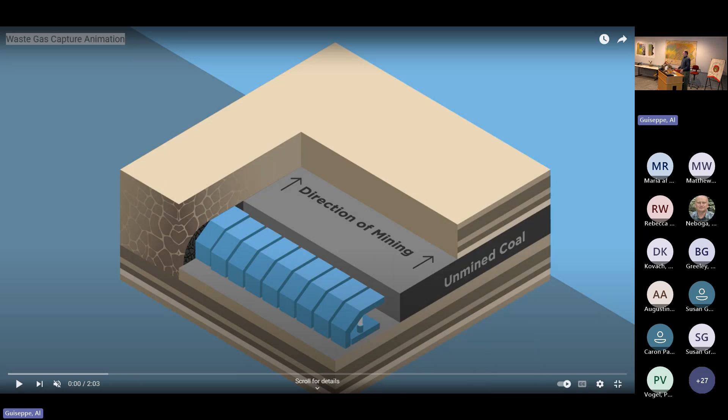By way of introduction, I just met him an hour ago, so I can't tell you a little story about knowing him for years. All I can say is that he's from Buffalo, so this weather ain't nothing to him. It's fine, like springtime. I know what you guys complain about.

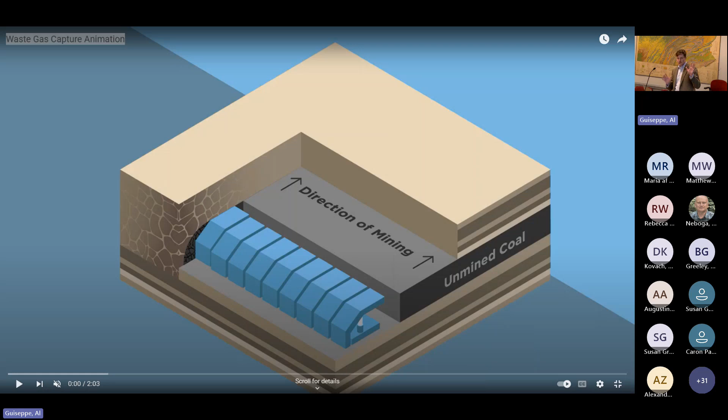Okay, so I won't delve into too much fundamentals, but I'm a visual learner, and I have a visual aid that a team of us put together to explain why methane is part of the mining process, and why degasification is so important from a safety perspective when mining is happening. So what I've got is a YouTube video, and I'd be happy to share this link with anybody who likes it. We're starting with an isometric view of what's happening underground.

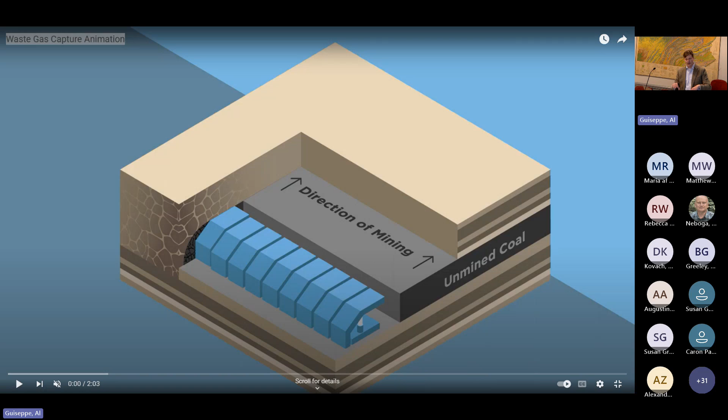On the right, you've got unmined coal, and this is typically a longwall mining operation where the blue supports you see are roof supports, where people are going to be standing underneath. That basically is what keeps anything from collapsing over their heads. As we click play, we'll zoom into what's happening under those blue roofs.

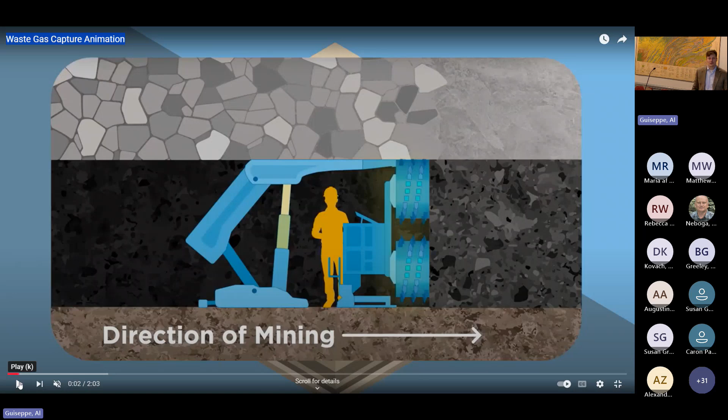At the front, on the right here, is the face, the longwall face, the shears. This is what's effectively mining this unmined coal to the right, turning it into smaller chunks and bits, and it gets spit out behind this guy. That is basically how mining is happening.

What we're going to see in yellow here is we're trying to animate the methane being released. Within the coal itself, there's a certain gas content. Geologically, each coal seam has a different gas content, and that determines how much methane is escaping into the underground workings. That's one component that contributes to coal mine methane.

The other component, you can see that yellow stuff coming out as he's moving forward. As that mine progresses and chews into that coal seam, you saw that roof bolt, or that roof above the guy, kind of hydraulic lift. It just pushes up and follows him forward.

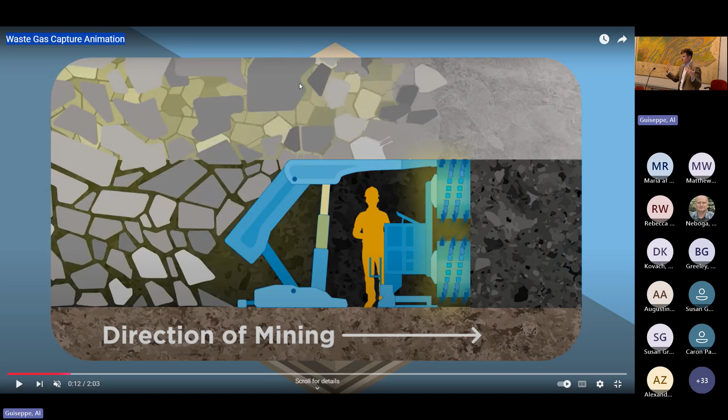And as it moves forward, the overlying strata that was previously mined collapses behind that roof support. And what's happening here is this overlying strata could be shale deposits, could be coal deposits, and all of that stuff collapses, fractures. There's mechanical fracturing, there's elastic deformation, inelastic deformation. All of these kind of stresses and strains are causing a release of gas from that overlying strata.

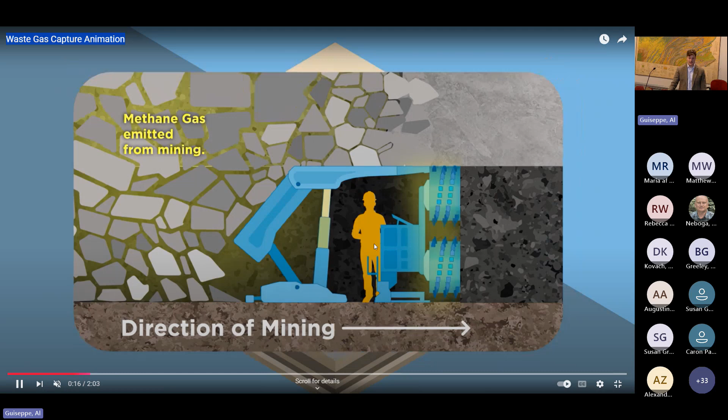And what we're trying to animate here in yellow is as the collapse happens and that mechanical fracturing and breaking of rock and shale and coal is happening from overhead, that is also releasing methane. And that can also get into this working area where this gentleman is mining. So as each kind of roof support moves, we're now going to animate what's going to happen with each thing happening in individual sequence.

The width of a longwall operation can be 500 feet to 750 feet, and the length of an operation can be 10,000 feet long in one direction before they move over to the left or to the right. So going back to this situation here.

So this guy underground has got methane coming at him from multiple places, right? It's coming from the coal seam as that coal is being chewed up and turned into smaller bits. That's releasing methane. As this overlying strata fractures and crumbles and unlocks elastic deformation and inelastic deformation from above, that's causing a release of methane.

Also, one of the interesting things that actually happens, and I didn't animate it here, is because of this pressure release that happens as you remove this coal and there's less pressure that comes down from above, some of the underlying strata can also release methane because it used to be held in place with pressure, and that pressure suddenly gets released.

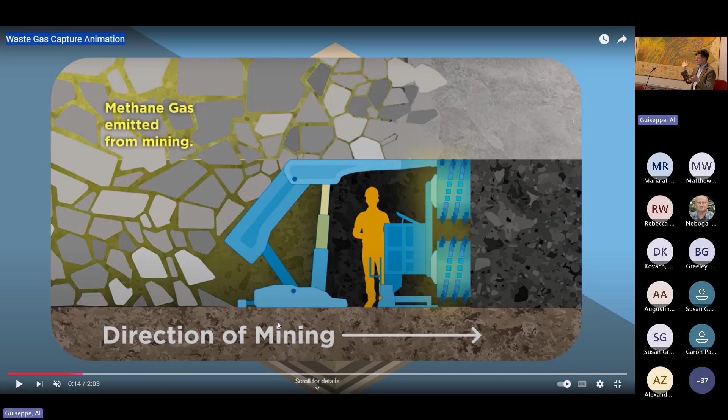So he's got methane coming at him from all sides, right? It's coming from the front, top, back, behind him, below him. So degasifying this mine is what allows this to happen safely. Methane is extremely combustible. Natural gas is primarily composed of methane. Lower explosive limit is 5%, 5 to 15% methane concentration is your typical.

Yeah, and so down underground, they don't want their methane concentration high. I think MSHA, so Mine Safety Health Administration, regulates the methane concentrations underground, and they must be below 2% at certain mines. The methane concentrations where these miners are working are monitored with high frequency 24/7 at multiple locations. If that methane percentage gets to 2%, they have to evacuate the mine, right? It's a bad day for everybody out, and we have to wait until the methane concentration comes down.

So mine operators don't ever want this methane concentration to get to 2% because of operational issues, but that Mining Safety Health Administration set that limit for a reason, and that is because underground explosions are the #1 cause of disasters in the mining industry, right? And so looking back to the 1800s, you had the canary in the coal mine, which was looking for methane, and if that was a problem, the canary died, they had to get out, right?

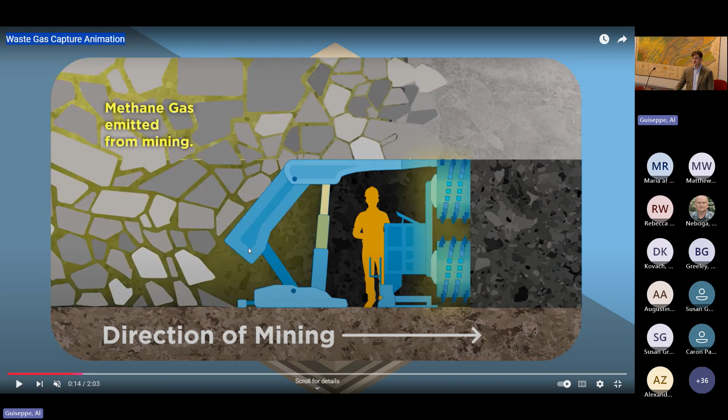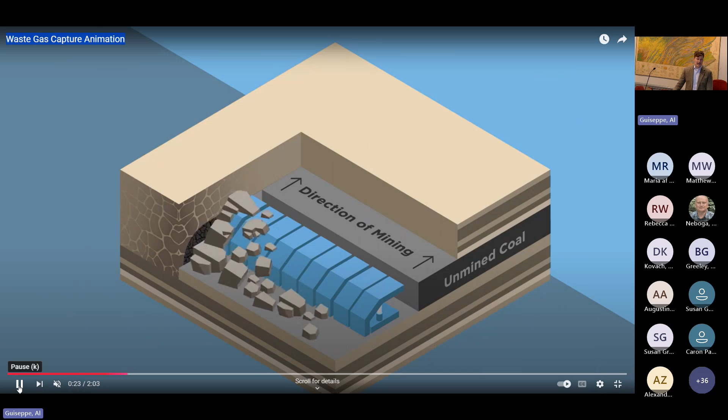So this is now being monitored with devices underground, and there are now procedures and processes in place that we'll go over next to get this methane down at safe limits to avoid any potential explosions or health hazards and for safe operation of the mine. So how do mines safely degasify the mine? And so we saw the crumble there.

What typically happens, traditional mine ventilation, they'll have an air intake above ground, which effectively they pump and they sweep across this working area with fresh air, and they push the methane out a vent stack. So if you are a miner working underground and you're standing here at the longwall face, you can actually feel the wind. It feels like you're standing in a storm, because you can feel the wind being pushed by these big, massive fans, and your pants and your sleeves are blowing in the direction of the airflow.

The problem with this methodology is, look, there's methane going to atmosphere, right? This methane going to atmosphere is of a concentration, like we said, less than 2% methane, and is mainly nitrogen, atmospheric components, CO2, oxygen, right?

So it is very difficult to do anything with this methane, and as you are all probably aware, methane is a very potent greenhouse gas with a global warming potential that is roughly 28 times that of CO2, meaning for every ton of methane that's vented to atmosphere, over 100 years it's going to do 28 times more radiative forcing and trapping heat than CO2.

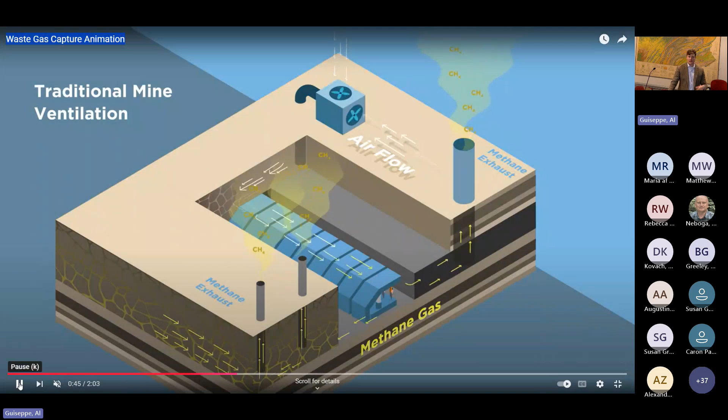And if we do that, the concentration of that methane is significantly higher. And with that significantly higher methane concentration, we can then capture it at that point and do something useful with it. So we have pipelines, compressors, processing facilities. This methane concentration at these sources can vary from 40% all the way up to 90-some-odd percent methane. So with that higher concentration methane, we can do all sorts of things. We can convert it into electricity, we can make heat, or turn it into some synthetic fuel of the future that our company is looking at, like sustainable aviation fuel or hydrogen. So that's the general premise of our process. This is something that we do today.

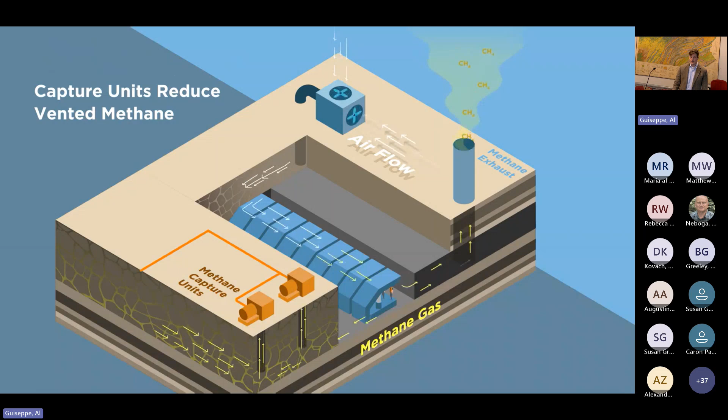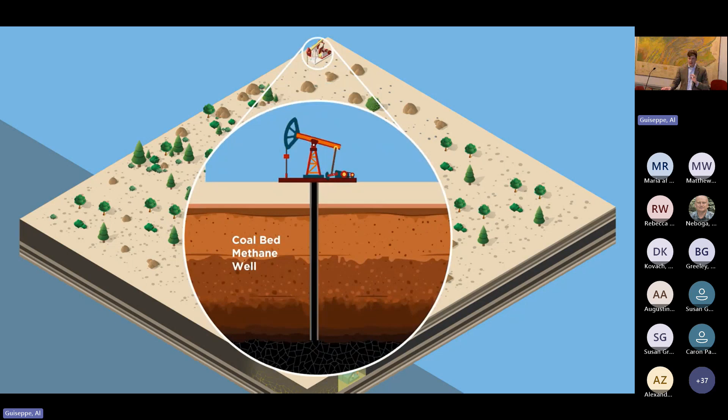I wanted to highlight the difference between coal mine methane and coal bed methane. So what we talked about was coal mine methane. Now, coal bed methane is just an oil and gas resource that is completely separate from a mining operation, but it's a well that taps into the actual coal strata itself and tries to extract the methane from that coal strata. So the fractures that feed into a coal bed methane well are not caused by a mining operation, whereas coal mine methane is directly related to that degasification.

Any questions on that? I know that's a lot of information. Maybe some of you are already familiar with it, but okay. Operating in Greene County? So there are active underground mine operations in Greene and Washington County, Pennsylvania. And CNX does have operations. That would be the Pittsburgh seam. Yes. Yes, sir. Tom? Just a general comment. Yeah. So these mines are well below the water table, so a lot of that pressure that's been removed is from the water that's been removed in order to mine the coal.

So what we've noticed about the Pennsylvania mines is that there is not a lot of water produced in the GOB ventilation boreholes, but there is certainly a dewatering that's happening underground in a water management system, and each mine handles and processes their water in a different way. So yeah, water is definitely a big part of this.

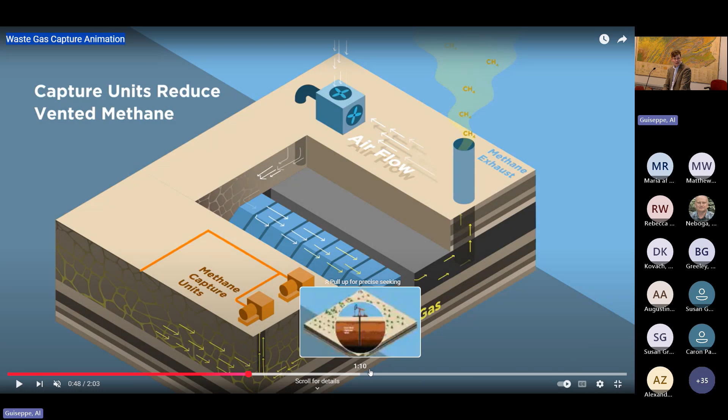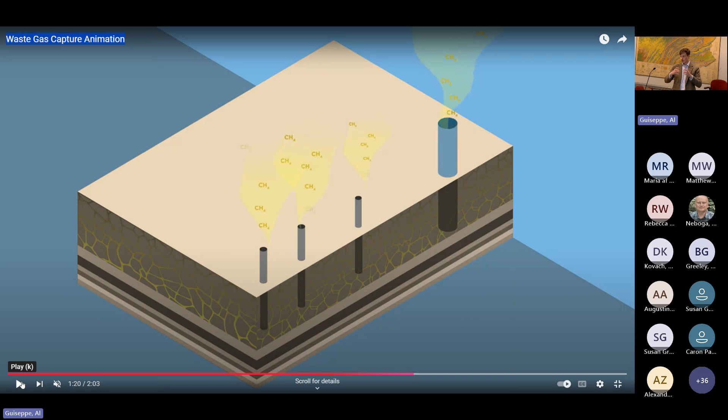Now, one thing that we'll talk about is what happens after active mining is done. A mine gets sealed effectively so that the water doesn't drain. Legacy mines may have acid mine water issues, but Pennsylvania, as you are all probably aware, has very specific procedures for sealing mines so that doesn't happen in the future. But these mines will still vent methane to atmosphere well after they've become sealed and abandoned.

And today, legacy methane emissions from abandoned mines, decades after they've been abandoned, still continue to emit methane to atmosphere. Now, in some cases these abandoned mines will fill up with water, and I've seen the water level rise within a given mine area. So at lower elevations, the methane production will drop off, and at the highest corner of the sealed district, it will still be producing. So it's kind of bubbling out of the water and then moving into the highest point.

Let's see. So typical mines usually use vacuum to de-gas a mine of methane. You're using pressure to do it? Vacuum at the GOB ventilation boreholes, yes. So we will pull a vacuum on a GOB ventilation borehole. Okay. For ventilation, they usually vacuum an air shaft. Yes, that's right. That visual I made was an attempt to recreate a vacuum, which is basically what the vent shaft is doing: it's moving air across the face and sucking air across, yeah.

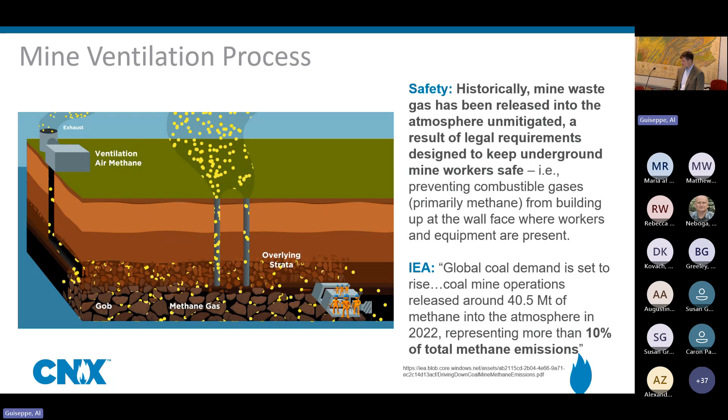This is zooming out and putting it into the context of the mine. So another visual here: air intake here, moving across where the underground mine workings are, coal faces here. As that coal is mined, the overlying strata collapses and turns into that gob. That's where a lot of the methane comes from, and we're pulling that to the surface. That air, as it goes across that face, picks up the methane and returns to this ventilation air methane bleeder fan, and then is more dispersed, less than 2%, as it's vented to atmosphere here.

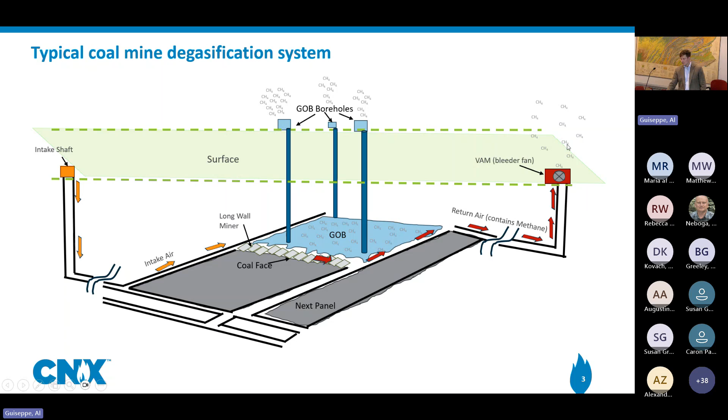So unfortunately, this pollution issue is forecasted to get worse with time, not better. We traditionally think of coal as a legacy industry that's decreasing in its utilization, but globally, coal mining is still status quo in terms of total production. So while coal mining has decreased here in the U.S. and in Pennsylvania, mining activity is increasing in China and India, which is even gassier in some instances in China. So when you look at the reserves left to be mined in China, with the overlying strata being gassier than it is here, the methane pollution anticipated to go to the atmosphere in the future is even higher than it is today.

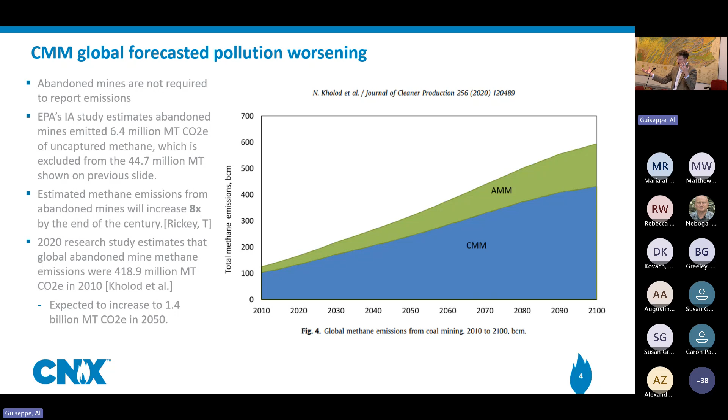So the blue shape here is active mining, and the green shape is abandoned mine methane estimates, and going out across the horizontal axis is a forecast into time. And so both active and abandoned emissions are forecasted to get worse with time. So this problem left unaddressed won't solve itself.

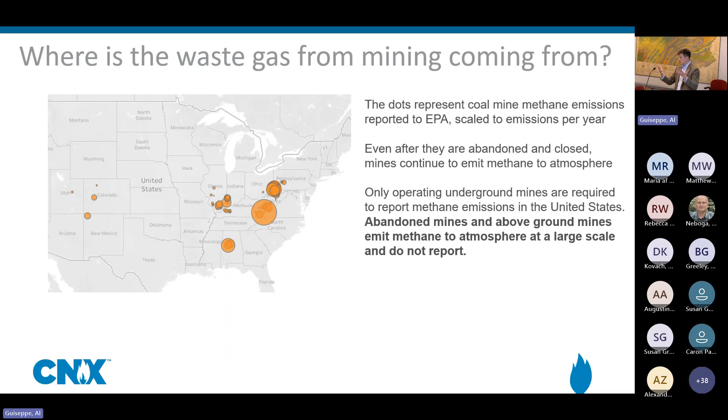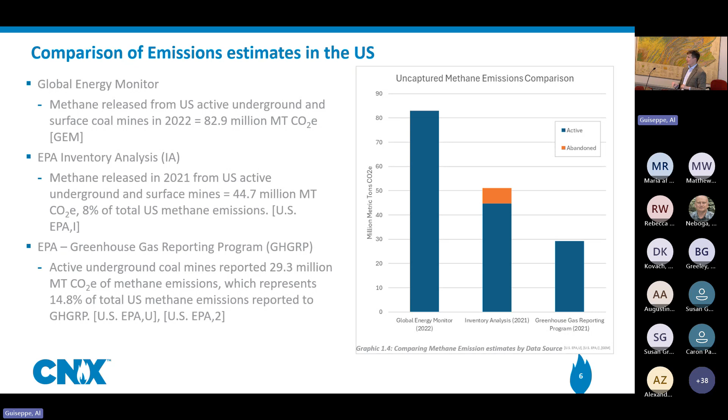Current estimates of emissions in the US. So I mentioned the Greenhouse Gas Reporting Program. This is what people are reporting, 30 million metric tons of carbon dioxide equivalent per year. When you add in the abandoned mines and estimate some of the missing pieces, EPA estimates around 50 million metric tons. Global Energy Monitor, which is an independent European organization, when they look at the US, at satellite data and at the concentration of methane geologically, they estimate it to be more like 80 million metric tons being emitted to the atmosphere every year. So it's difficult to put a pin on exactly how much is being emitted.

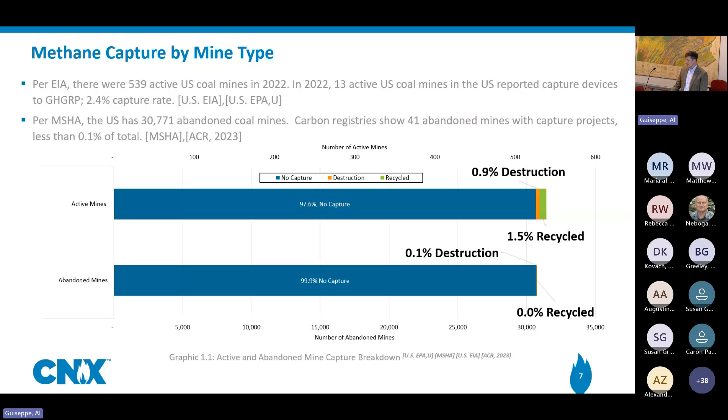Unfortunately, there is not a lot of capture happening. There are 539 active mines in the US. Only 13 of them are capturing coal mine methane and destroying it, converting it into CO2, while the overwhelming majority are venting to atmosphere. Very similar story on abandoned mines. So how can we change that? How can we use this stuff?

Because we're pulling on atmospheric components, we have a lot of nitrogen, carbon dioxide, and oxygen. We can't put that into end-use applications because those systems aren't built to handle the nitrogen and carbon dioxide, so we have to process and remove them before we transport it to an interstate network, which then goes into a residential system.

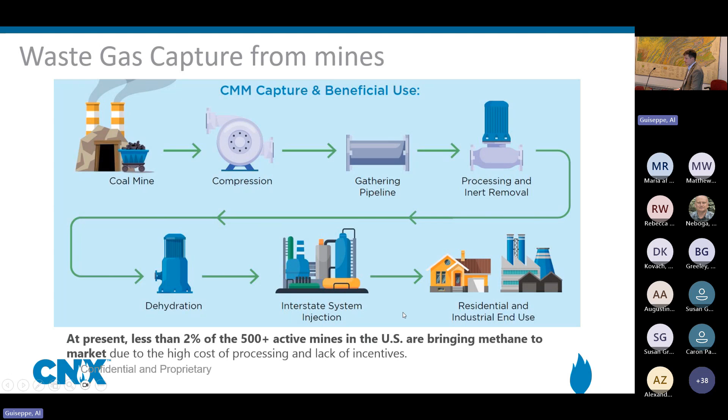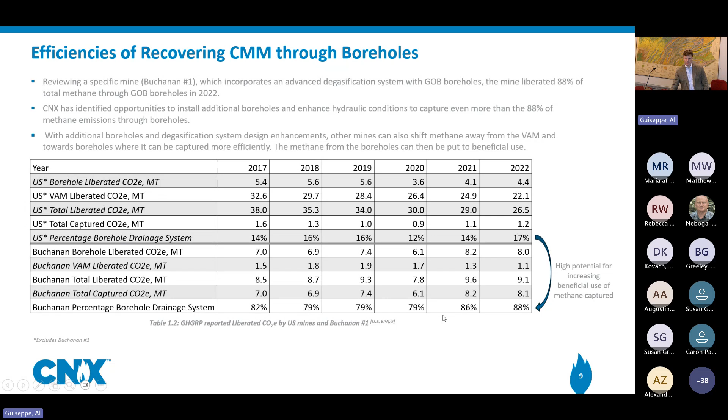So just looking at the United States, if you look at total capture outside of CNX's operations in Virginia, they are only getting around 14% captured in terms of volume, but we are able to get 86% roughly on average in our system.

Meanwhile, with the advent of carbon credit markets, certain carbon credit markets, voluntary or compliance in the California Air Resources Board.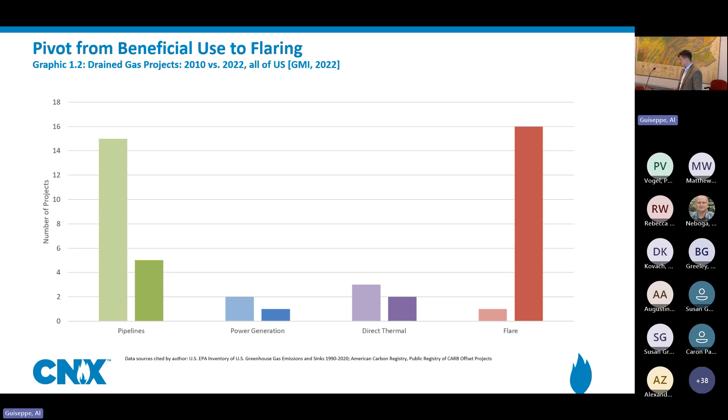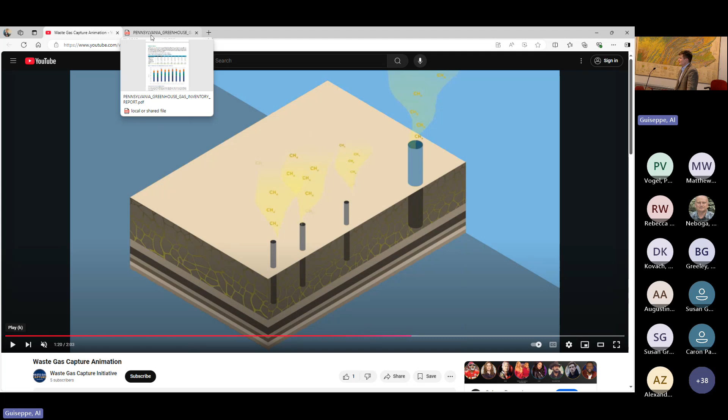So I wanted to zoom in on Pennsylvania. I'm going to pull up the greenhouse gas report from the state. If you had to guess, what percentage of industrial emissions come from coal mine methane? In Pennsylvania, industrial emissions get grouped in with things like steel making and manufacturing, and coal mine methane is a part of it. What percentage would you guess is coming from coal mines? 2%? That's a pretty good guess. Anybody else?

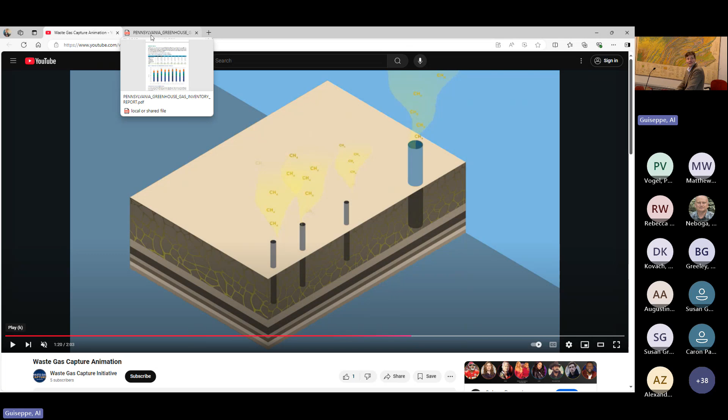It's around 14%. What we're seeing here is natural gas and oil, like leaks in oil production or natural gas production, and leaks in the gathering system. That's around 16 million metric tons. Coal mine methane is 11.6 million metric tons, so it's around 14% of the 80 million metric tons total. So it is a large part of Pennsylvania's greenhouse gas footprint.

Go back to my... wrong way. There we go. Is this, am I doing it right? Does that work? Sorry, I'll let you.

So methane in total in Pennsylvania's greenhouse gas emissions is around 13%, and within the industrial sector, as we looked at earlier, coal mine methane is around 14%.

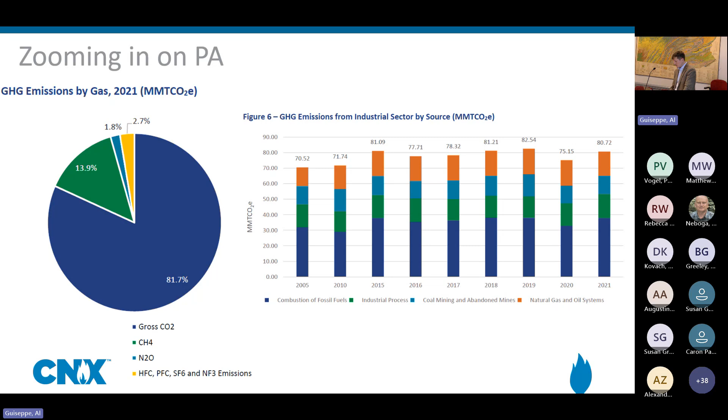So now I'll pivot to what we're doing in Virginia and what I am trying to develop in Pennsylvania, and that's collection for beneficial use. This is a picture of our system. On the far right, the blue is the area where we capture the methane, and the black lines are pipes we've built to connect into different beneficial end uses. We actually cross 3 states with our system: West Virginia, Virginia, and Kentucky.

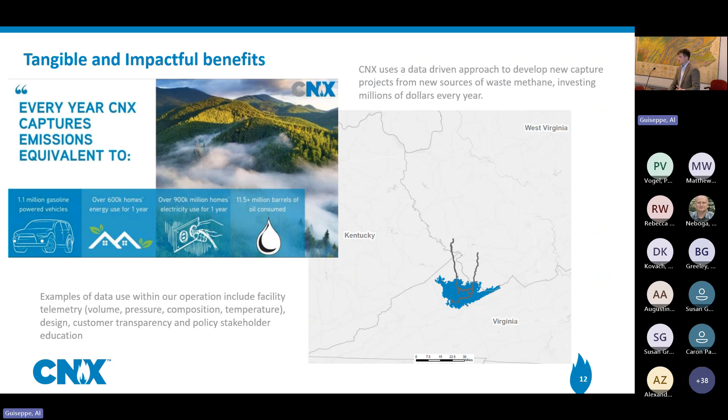We have hundreds of miles of pipe connected to hundreds of wells. The amount of methane we capture is, on an equivalency basis, around 1 million gasoline vehicles operating for a year. That's how much pollution we're able to avoid by capturing the methane in Virginia. Or 600,000 homes, which is a very large city's worth of energy use we're effectively offsetting by capturing this methane and doing something beneficial with it. So it's a pretty measurable, tangible, and impactful thing.

So we talked about the problem, and what I've been trying to advocate for and get support for is having some sort of marketplace or demand side premium, to recognize that this isn't easy to do, it's expensive, and we need some additional incentive to deploy these systems to go capture what is today a pollution problem and turn it into useful energy. There is no regulatory framework that says this methane must be captured. While MSHA says you must get it to the surface, EPA does not regulate these emissions like it does with oil and gas.

We talked about business as usual. It's very rare, these systems are very rare. The amount of methane being captured with flares is de minimis, so it's very outside the norm and deserving of additional support in order to deploy.

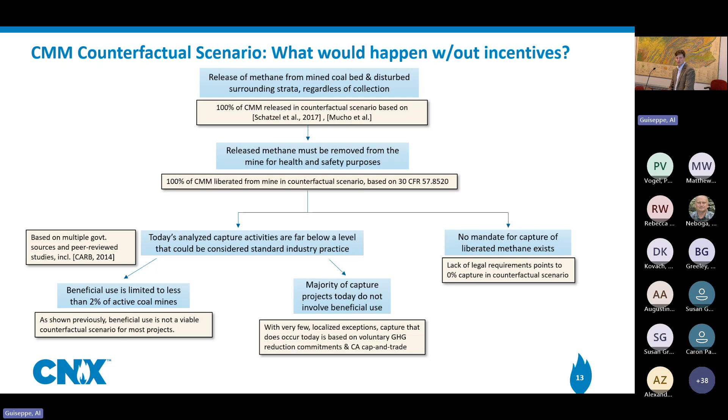So that gets us into carbon markets, and one of the things I've put a lot of work into over the past 3 years is developing markets and customers that appreciate the environmental benefits of this energy resource, really similar to renewable natural gas. Some of you might be familiar with landfill, dairy, and swine farms—they deploy methane capture systems there, and they have end-use customers who pay a premium or are supported with subsidies federally or at a state level for that methane.

So we are looking to create something similar to the renewable natural gas policy to be applied to coal mine methane here in Pennsylvania, so that we can deploy new systems to capture and convert this stuff into some sort of beneficial end use. There are a lot of requirements we have to go through in order to be eligible for those types of programs.

I've just listed some of the things that we're working on to be transparent with people in the marketplace about what we're doing and why it's environmentally beneficial.

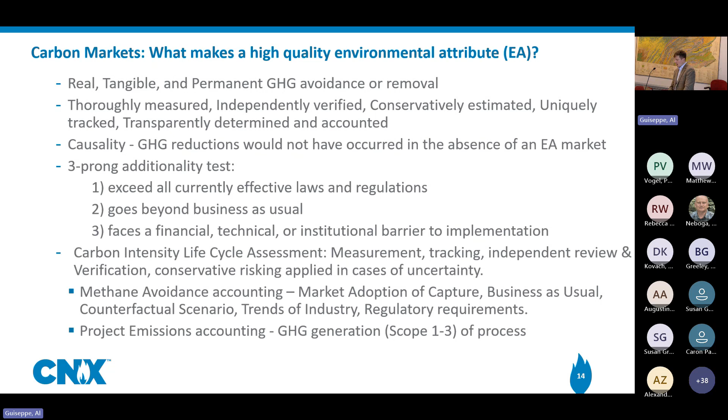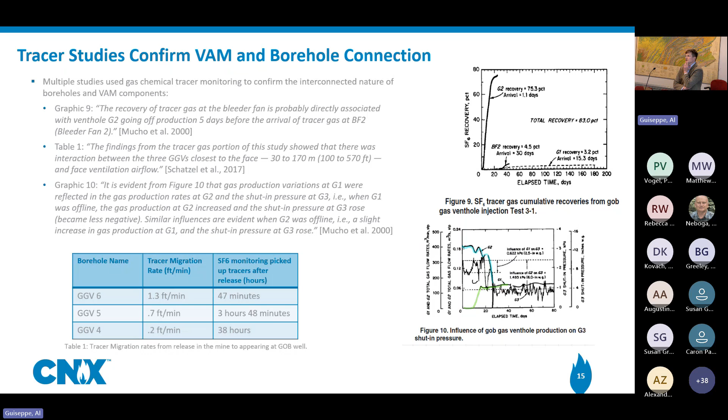One of the more technical and interesting things I thought you might be interested in - let me go back to this visual.

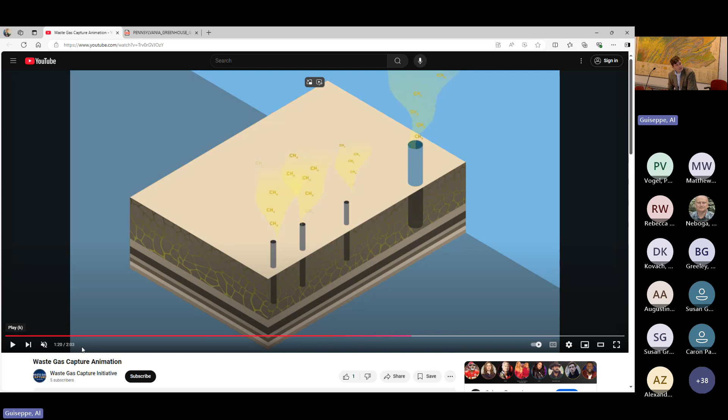NIOSH did a study where they injected chemical tracers down one of these gob ventilation boreholes, shut in the borehole, and monitored it. They saw that same chemical migrate through this underlying gob strata and up into this ventilation shaft, meaning they proved the interconnected nature - you can see it's interconnected, but they were able to prove with tracer studies that it will migrate from one to the other.

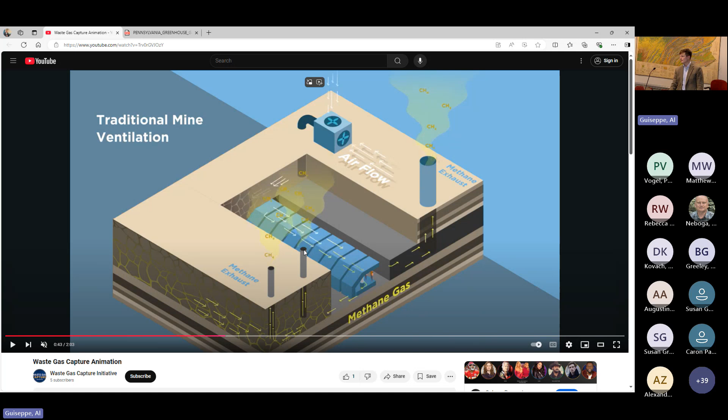They also did it vice versa, injecting a chemical tracer behind this shield, pulling on it, and getting it to come out of this gob ventilation borehole. That's what this study confirms. Basically, they showed that after 47 minutes it moved from one to the other, or in some cases it was a few hours.

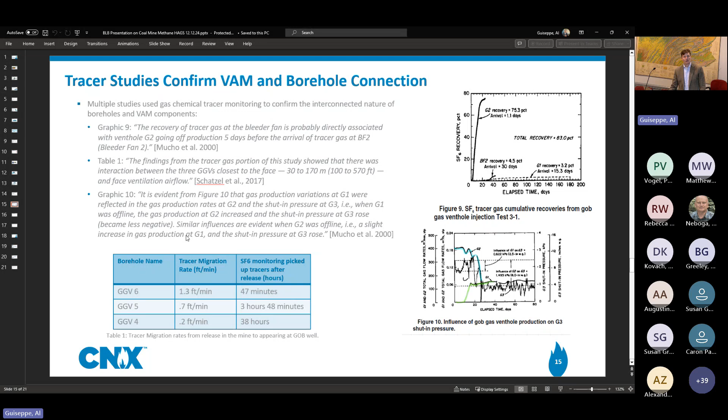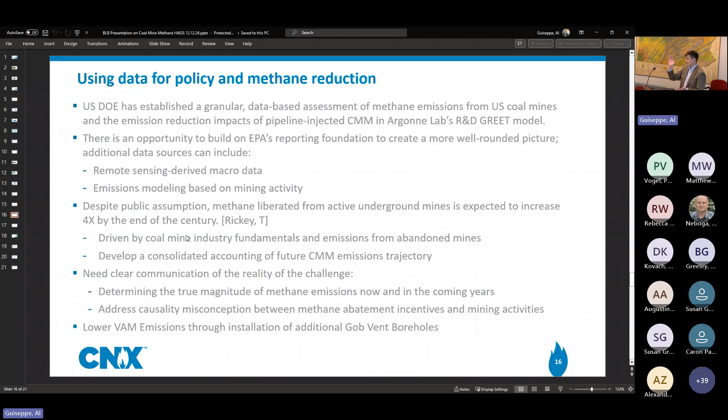We have worked with the Department of Energy and EPA to get more support for new systems. I'm really hopeful we'll be part of Pennsylvania's RISE PA CPRG grants. We're also looking at incentives made available through the Inflation Reduction Act, and in Pennsylvania, the Alternative Energy Portfolio Standard - the electricity portfolio every producer or retailer has to have a certain amount of alternative energy in their mix. Coal mine methane is an approved product, so when converted to electricity, we can help these suppliers or distribution companies meet their required alternative energy portfolio.

So key takeaways that I'll leave you with: while today there's no legal requirement to destroy that methane, it is required to be liberated. It's not very common to use it beneficially, but we're trying to do more, and trying to get the policy support to do more. I see over the next 5 years a huge opportunity for Pennsylvania to become a leader in low carbon gas, supplying reliable energy to growing energy demand while also reducing pollution. So that is my story. Thank you.

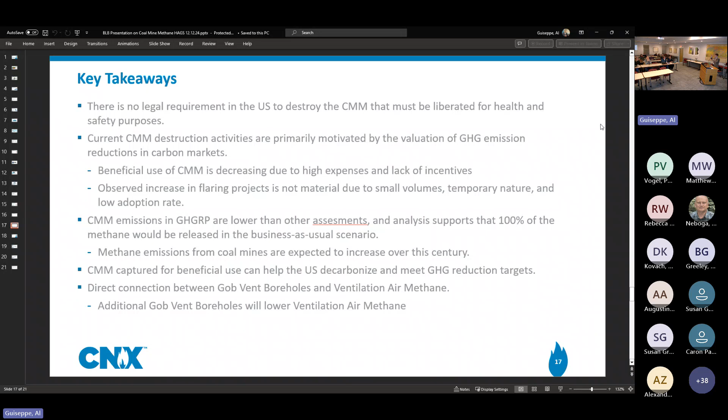Yeah, I think there is. There's some sort of clay thing they've been researching. I work for a company called CNX. The way we got into capturing this methane is, previously we were part of Consol Energy, and we split - so Consol's got the mines now, and we've got the gas operations. Consol did a bunch of projects with DOE on a few things like that. One is a catalyst - instead of a regenerative thermal oxidizer, they've got a catalyst system that lowers the methane concentration. I know MIT did a study with clay to absorb, or strictly speaking adsorb, the methane, and I honestly don't know if that's commercially successful yet.

The question of groundwater effects came up earlier - what's your economic outlook knowing that once they stop mining out here, the groundwater is going to come up and completely shut off some of the wells? That's a really good point. As I was mentioning, some wells we expect to have a longer useful life, and the way we model it is, like in Pennsylvania for example, 1 in every 4 wells will be plugged in the first year due to water or being pinched off. So we assume one in every 4 will go out, have a good 6 months, and then nothing. We bake that into the modeling, and after about 5 years we'll model another well loss because of water.

Do you ever get enough gas to actually come up to pipeline quality? Yes. Is that around 1,000 BTUs per cubic foot? What we run up to for pipeline quality isn't necessarily the BTU per cubic foot, but the total inerts percentage has to be below something like 3%. And yes, we do achieve that - on an active gob ventilation borehole, we can have 97%.

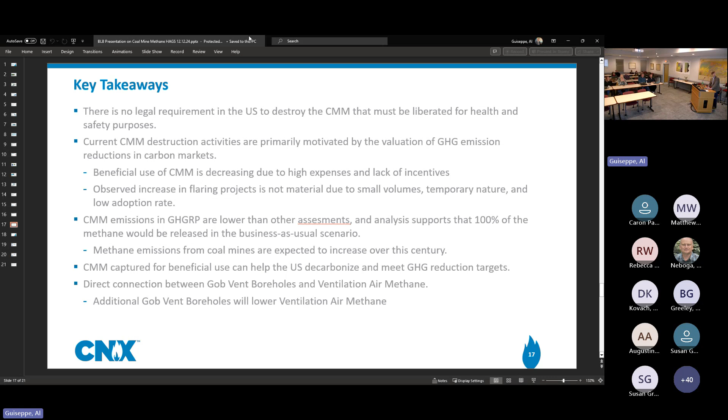During the flush period, we can have above 95% methane for 2 months to 6 months.

Is there any effort made to continue generating methane through microbial degradation or other enhanced production? There have been some people out west who have done that. That's not something I'm focused on, because I see that more as a resource play, right? We've got coal that we can turn into methane, and I think this area is blessed with a lot of natural gas resource. So I'm really focused more on the pollution mitigation aspect, and that environmental attribute carrying through into new capture, whereas the microbial process you're talking about is more of a new resource opportunity. I think I've seen a presentation from somebody in Wyoming who has done that.